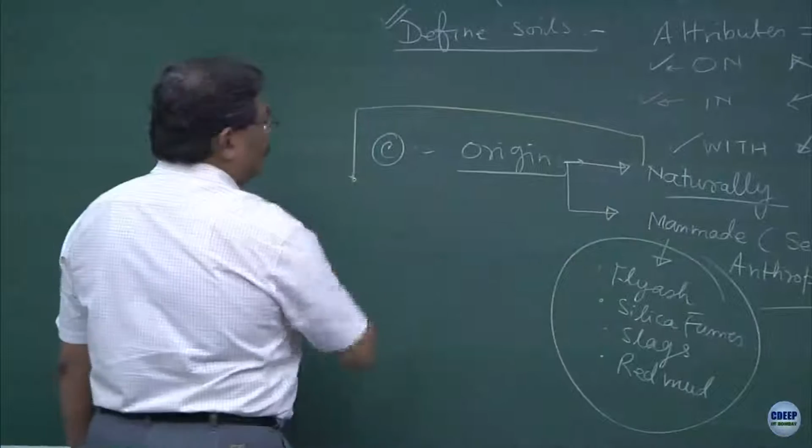So, when we talk about naturally occurring soils, and there have been a lot of questions regarding this, these are basically from disintegration of rocks, which we discussed some time back. There are three types of rocks you must have studied.

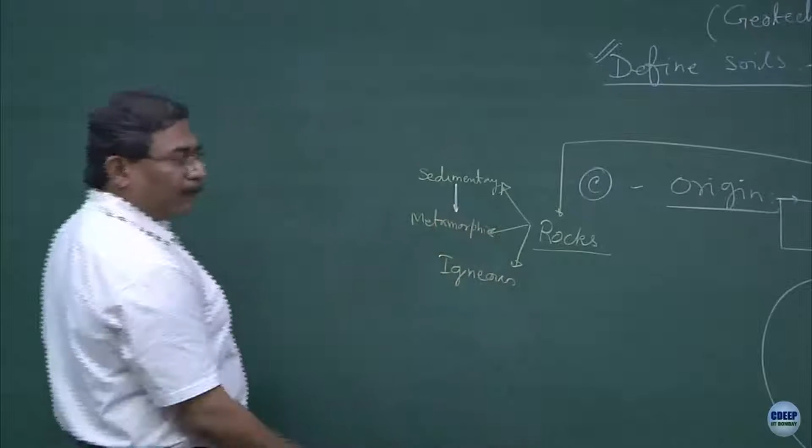Very good. Sedimentary, then... why have I written it like this? Metamorphosed or metamorphic? So, this is basically the rock cycle, is it not? So, sedimentary to metamorphosed or metamorphic, and further action of pressure and temperature and all the agencies which we have discussed, the carriers. Mostly this is P and T, pressure and temperature conditions.

So, sedimentary is the one which is, remember the Himalayas, there is a lot of weathering process going on, big boulders getting formed, they keep on hitting each other, they get fragmented because of the flow of water. Each fraction keeps on becoming smaller and smaller by the time it comes to the Gangetic plain. And then from the Gangetic plain up to Calcutta, Hooghly, all these areas, what happens? Even the small particles become much finer, alright.

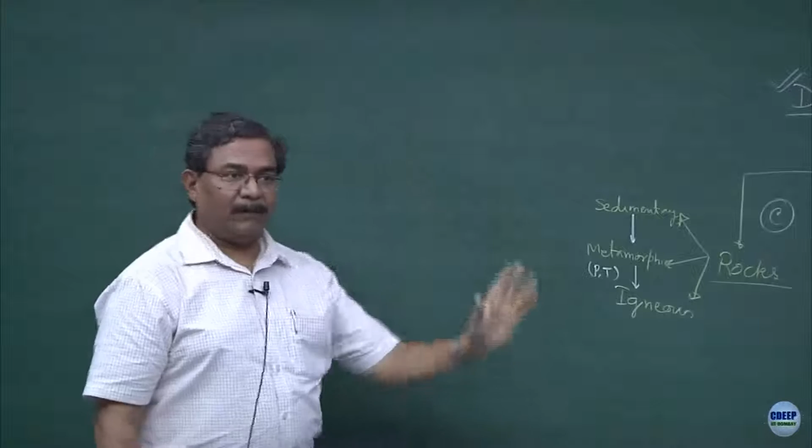So, conversion from very big size to medium size to the finest size, and this is a journey which the material is following, in geological time scales. So, sedimentary is something, please understand this concept carefully, this is going to be useful forever. You have seen deltas, alluviums, fan formation. Sundarban is a beautiful example of a delta which has got created at the junction of the Bay of Bengal and the Hooghly river.

So, what has happened? Suppose you do the mechanics of this problem. The river is bringing sediments. What are these sediments? These sediments are the disintegrated form of the rocks which are coming all the way from the Himalayas, mountains, clear? And they have been travelling so long in terms of time and distance, and they got fragmented, they got super fine. Weathering process, somebody was asking what is weathering. So, these rivers have a lot of suspended load, we call them sediments.

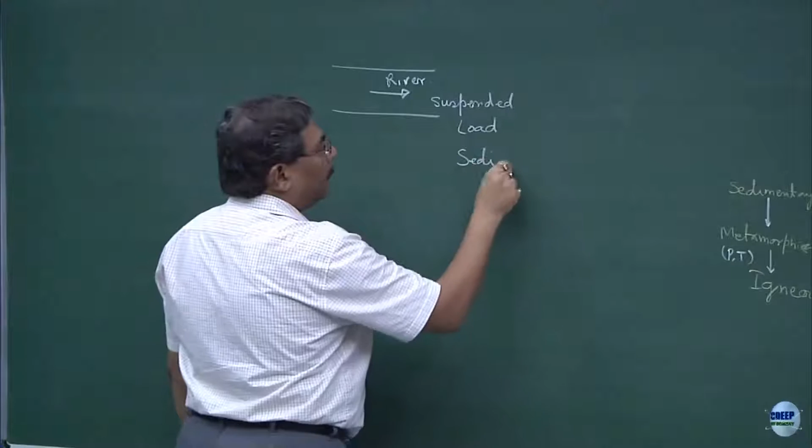Alright. Mostly this is fresh water. Try to capture the attributes. For an engineer the attributes are very important. So, the keywords which I use, what did I do? I said river, and then I said suspended load, from where the suspended load is coming, from all that weathering process, agreed. And then suddenly I brought in the concept of fresh water. What does fresh water have to do with this context? Density of the fluid, clear?

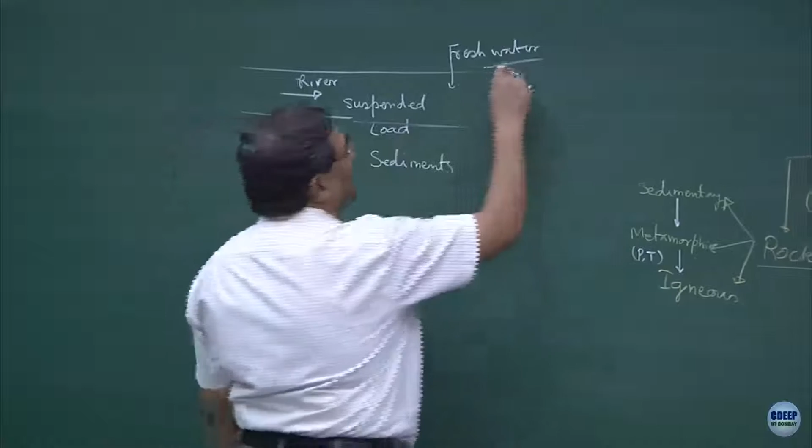So, the fresh water, let us say, because I am sure all of you know that from the stretch of the Himalayas up to a certain portion where the Ganga comes, the water can be drunk without filtering it, and then human activities start and the water becomes polluted, clear? But there was a time when people used to drink it up to Varanasi or Allahabad or Gaya and Prayag and what not. So, this is fresh water, its density is going to be less, and it suddenly comes and meets the Bay of Bengal.

I am sure many of you would be taking it up as a research project in your career in whatever form, I do not know. So, it is very deceptive. Right now you think you will never do this, ultimately you end up doing this. Even if you become a CEO of a company, you will realize that most of the development is going on now in these areas in the country. Most of the companies are establishing themselves over here.

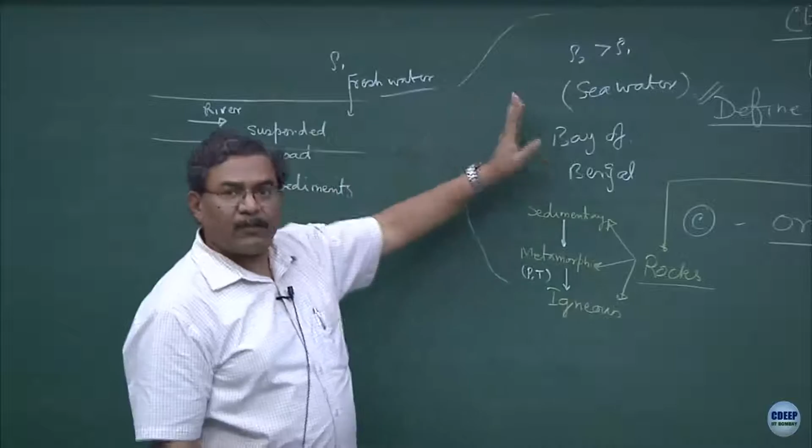Now, what I am going to tell you is, this is typical sea water. What is the emphasis? Why am I saying sea water? Salt is fine, density, correct? Density contrast. So, if this was rho 1, this has become rho 2, where rho 2 is greater than rho 1. What is going to happen? A lighter fluid entering into a denser phase. What is going to happen? Sorry? Say it loudly. No. Yes. Someone else? What are the attributes of the system?

This system is fresh water having a lot of suspended load. All of you must have realized the turbulence in the aircraft when you travel. Why do you face turbulence? It becomes jittery. Why? You are going from a lighter phase of the air into a denser phase, clear, particularly when you land, then most of the problems come. And when you take off, imagine, close your eyes, you are moving into a denser fluid and again coming out into the lighter fluid. Is this correct? So, the same thing is happening over here.

The rivers carrying suspended load, and these suspended sediments are entering into a denser phase. What is going to happen? Velocity reduction, number 1. The moment velocity reduction occurs, all these sediments will have a tendency to settle, correct?

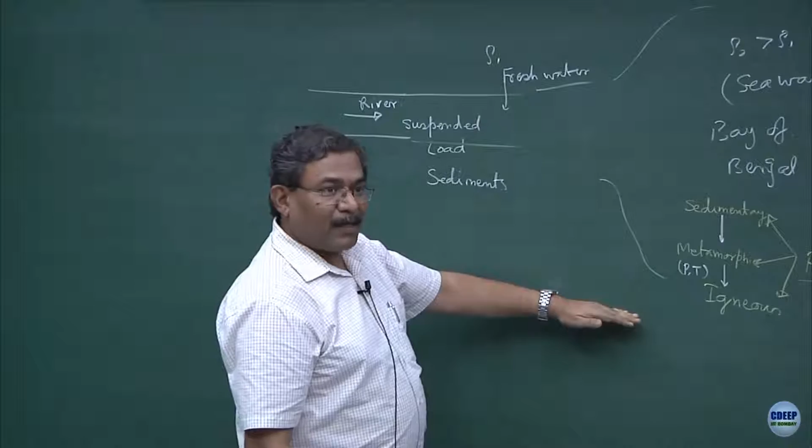Sedimentation process. Is this part clear? The rocks which are formed because of the sedimentation process. Now, what are the major players in the formation of the sedimentary rocks? Simple process like this: loads of sediments which are present in the fresh water are entering into a system which is denser.

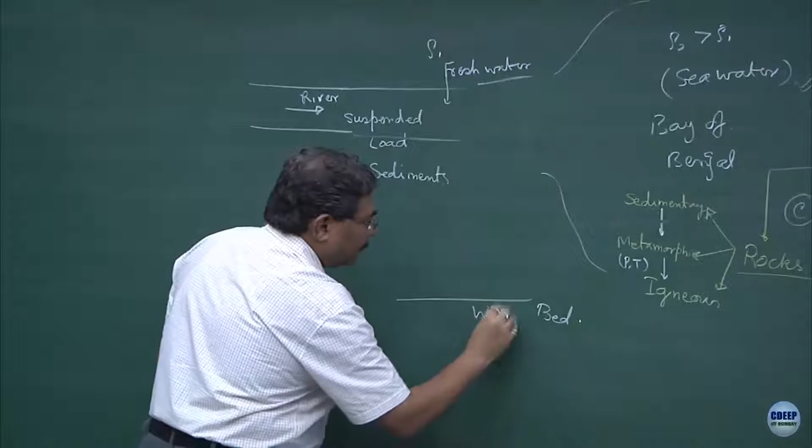Sediments have a tendency to settle down. Now, look at the micro mechanism, what is going to happen. So, if this is the river bed or ocean bed or whatever it is, I will say water body bed. So, this is the bed of the water body, clear? And imagine this is the fresh water. Normally water we depict like, you make a triangle and draw something like this. This becomes a water level, clear? Connotation is like this. For soils we show a horizontal line and this is the ground level.

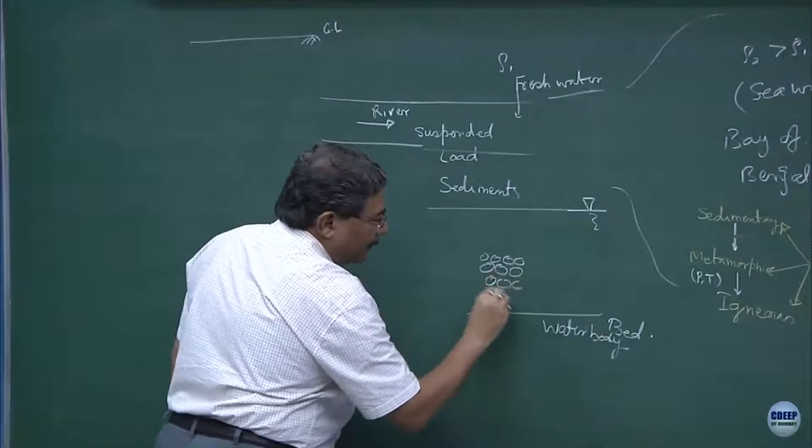Is this okay? So, all these sediments, mostly coarse grained materials, they keep on settling. Initial process. Next load of sediment comes, it gets deposited like this. The whole process is happening under gravity, clear? Nothing else. In the process, somebody was asking about bacterial action. Might be a situation where the bacteria starts secreting something and they all become a cohesed material. Cohesed means cohesion. Individual grain is now getting glued because of either microbial activity or it could be because of physical activity also.

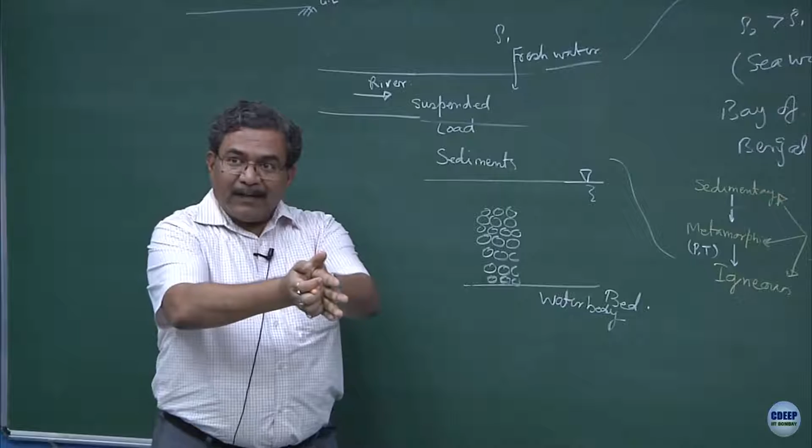Suppose if I take two particles, take two balls and press them hard, cold welding, what happens? There is a contact which you have created, very high pressure, clear, and low temperatures, alright. Otherwise everything is going on with self weight. Later on I will use this concept to define the state of the material in engineering aspects, that how you are going to make buildings on these type of formations, clear.

Now, this system gets metamorphosed because of several things: pressure, temperature conditions, chemical conditions, temperature, fire, whatever, becomes metamorphic. Under extreme temperatures and pressure, this becomes igneous, it becomes magma, it becomes highly uniform system. So, these are the igneous rocks. I hope you are aware of some of the examples. You can write

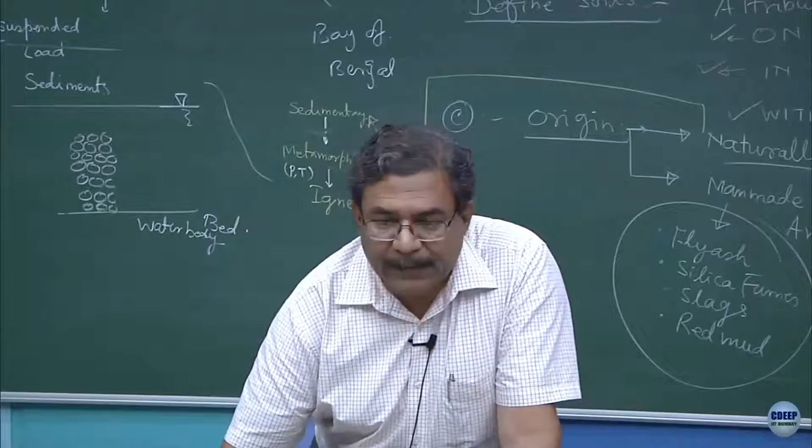what are the examples of sedimentary rocks? Sandstones, clay stones, limestones, mudstones, shale, conglomerate. Fine. I will repeat: sandstone, limestone, mudstone, shale, and conglomerate. Should I write or is it okay? It's okay.

What are the examples of metamorphic system? Yeah, so we were talking about this metamorphosed or metamorphic rocks. So, when the pressures are very high, the type of rocks which you are going to get formed is marble and quartzite, and when temperatures are very high, what will happen? Then you have shale and schist. Slate, see, if pressures are very high, I write normally like this: if pressures are very high, then you have marble and quartzite.

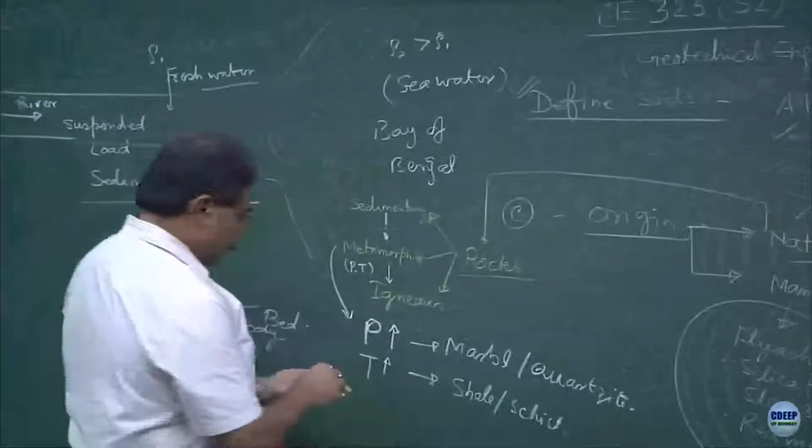And when temperatures are very high, what is going to happen? Shale and schist. And I think sedimentary rocks, I have given several examples, all sorts of limestone, sandstone, clay stone, they form this category. Igneous rock, under acute pressure and temperature conditions. Any examples of igneous rocks? Basalt, granite, alright, they form the category of igneous rocks.

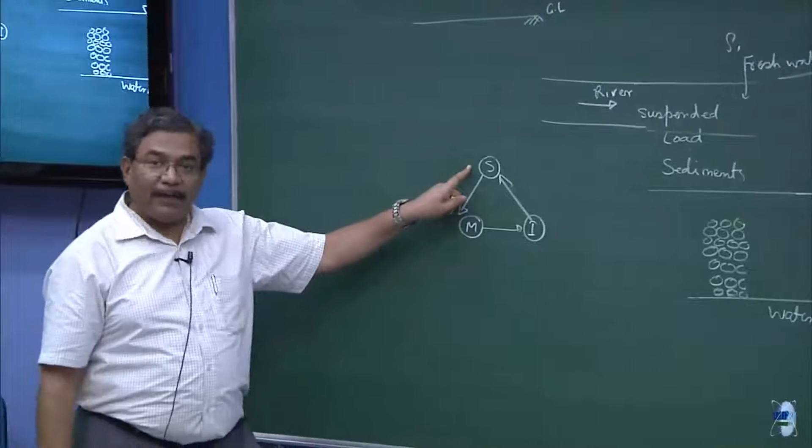Now, soil could be formed because of the processes which we have already discussed, out of any of the three. So, let us use S, M, I. So, you have a triangle, sedimentary to metamorphic to igneous, and further disintegration of igneous might get resulted into the sedimentary also, clear, and at any stage of this you might find soil getting generated. Only thing is that these are functions of pressure and temperature, the conditions. Is this okay?

Now, what does this have to do with the definition of the soils? You remember we were talking about the attributes, profession, then we were talking about uses, then we were talking about what is the origin, and now we have to talk about the transporting agencies. Is this fine? One question which comes automatically is, what is the difference between rocks and soils? Any idea?

Again, this has to be profession dependent. Again, it has to be process dependent. By thumb rule, if I need to cut anything or if I need to blast anything, you were talking about reclamation. Is this correct? Okay. So, if I have to cut something or if I have to blast something, that means a hard system. Normally rocks are cut and blasted.

There are different types of cutters. Right now metro work is going on in the entire Bombay city. You can go and visit what's happening there, how they are cutting the entire rock mass. What are the tools which they use to cut? We call them tunnel boring machines, TBMs. There are very good videos available on the websites, YouTube and all. You can watch them.

I won't advise you to go inside, because some time back when I took some of the students there, one of them fainted at 80-meter depth. Most of you are not physically very fit, is it not? There is a phobia, there is blood pressure, and there are a lot of other diseases which you guys have, and under these environmental conditions, mostly people get panicked. So it's not a very advisable thing to carry everybody there and ultimately invite a lot of problems for yourself. It requires a lot of mental strength, I would say.

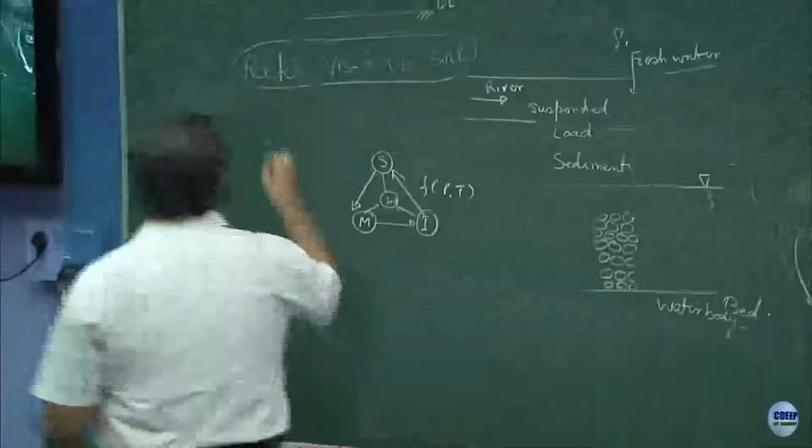I have some videos which I can show you privately of the tunnels which are being done in Bombay city. Anyway, coming back to the point, rocks are the ones which need blasting and cutting. Normally soils are not of that type, they are mostly excavated. Okay. So this is one of the differences in a very layman's language: rocks need cutting and blasting, soils normally do not. But it may so happen that soils also might require some cutting, but definitely not blasting operations.

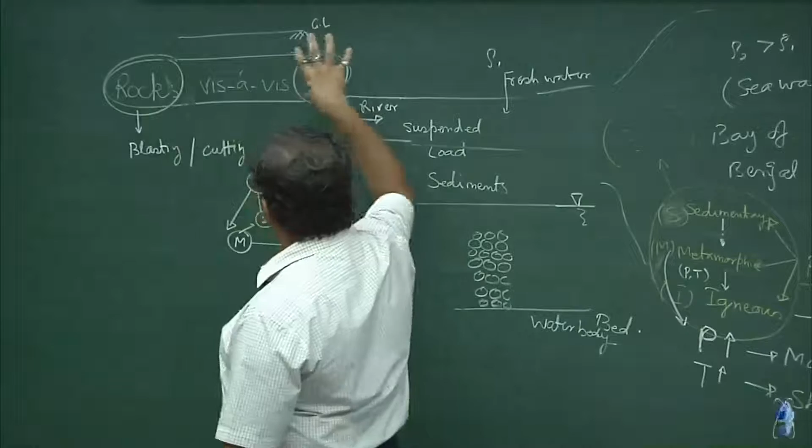You must have studied the Mohs scale of hardness of these materials and so on. I can say that these are the parent material, these are the offspring, and hence the matrix. You understand the matrix? Matrix means texture. This texture is very fine as compared to the one which you are wearing. So the physical appearance, all right. So the texture is different. Rocks are mostly, I can't use the word very smooth, because sedimentary rocks are not going to be smooth, clear. So they are basically made up of stiff matrix, okay, as compared to the soils.

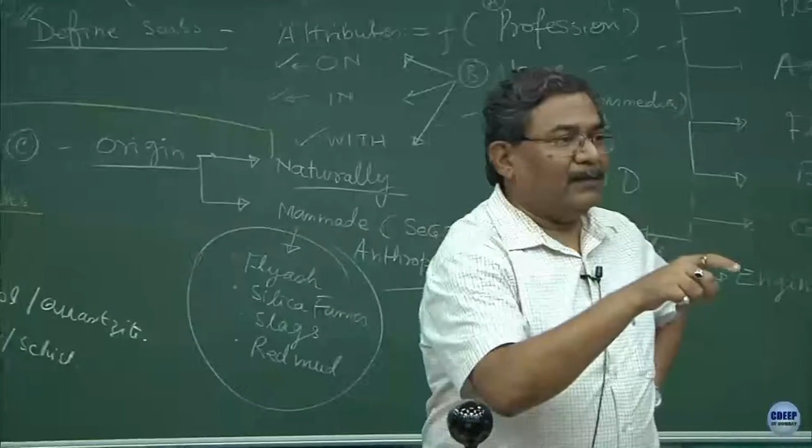All right. This is another way of differentiating, but it so happens that the mineralogy is going to be the same. Why? That is DNA. The linkage is going to be between the parents and the kids, genetics, clear. So the mineralogy of this system is going to be the same as the mineralogy of this system. But somebody was asking about the mineralogy also getting altered. So chances are that whatever minerals are present in a very intact, dense form would be present over here, with or without abnormalities, but not in that dense a matrix. Is this okay?

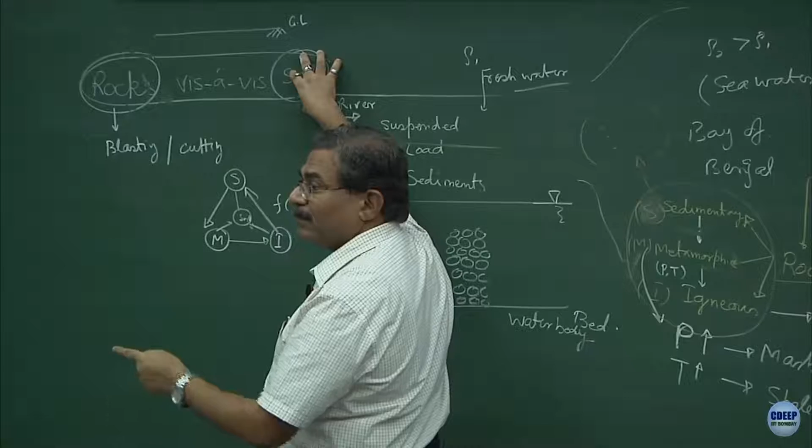Now what you are asking is a research idea. I remember long back when India was initiating the Mars mission, ISRO had sent some samples of the Martian soils to my laboratory. I was a part of that mission. We were testing those samples, and I was trying to understand what would be the relationship between the two. That's what NASA does. They send rovers to take samples of the rocks and detect the mineralogy using X-ray or some non-destructive way. And if I can relate that mineralogy to this, my job is done. I have created a linkage between the two.

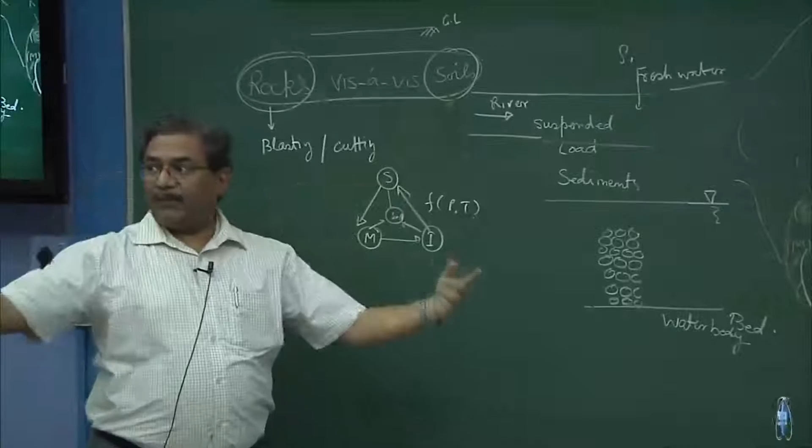Carbon dating is one of the ways to find out the origin of these types of soils. You got the answer to your question? Read more about this. It's a very interesting topic of research, and many people are working in these areas, particularly those into offshore engineering and hydrates, the origin of soils in which hydrocarbons are present, or a particular type of mineral you are looking for. So, as I said, you have to take care of this and your intentions. Put these two together to deal with the material. This becomes more of an intuitive task.

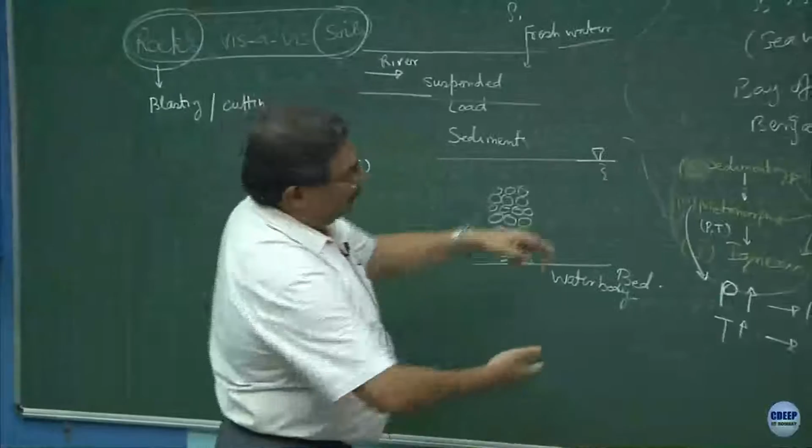Now, let us enter into the classification schemes of soils. When we discussed types of rocks, I linked them with the naturally occurring soils, which is the origin. That is the classification scheme for rock. Now, let us talk about the classification schemes which are used for soils.

If you remember, in the beginning of the lecture I said creation is one thing, transporting agency is another thing which attributes a lot of knowledge into the system, and the ultimate thing is how it gets deposited. You remember the three stages: origin, transportation, and deposition. There I tried to give you some hints—somebody goes outside, gets exposed to the environment and society more, as compared to one who remains confined to one place, in residual systems. Clear? We will talk about this now.

These are naturally occurring processes. You can contain, you can slow down, you can retard the process—that's engineering, that's technology.

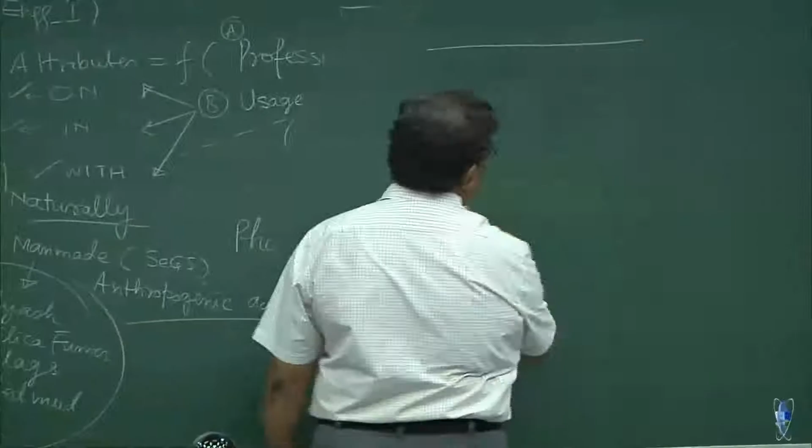If you go to the Middle East, it is famous for having big cavities in the subsurface strata I was talking about. So the million dollar question is: check it on the net, why is it difficult to lay foundations in most regions of the Middle East? Suppose I lay a foundation over here—you never know there will be a big cavity over here. What is this cavity? Look at this, another example of the chemical process.

Coming back to the question asked—these subsurface deposits are very notorious, mostly limestone, and they sit in coastal areas. What does seawater have to do with this? This seawater ingresses into the foundations or strata and has a tendency to eat up the limestone, creating cavities under very specific conditions of pressure, temperature, and humidity. This is known as lime dissolution.

I was a consultant to Bandra Sea Link—I don't know if you're aware. All the foundations were designed and verified by me in 1998-99. A big problem was this: you might lay a foundation over here and never know there is a big cavity waiting for you. Hope you understand what happens—caving in. The moment traffic goes on the system, the entire pier of the bridge or the foundation might sink into the cavity. So in UAE, Sharjah, Middle East, Oman, all these places, the big problem is lime dissolution because of seawater under very specific conditions of pressure, temperature, humidity, and salinity—a chemical process.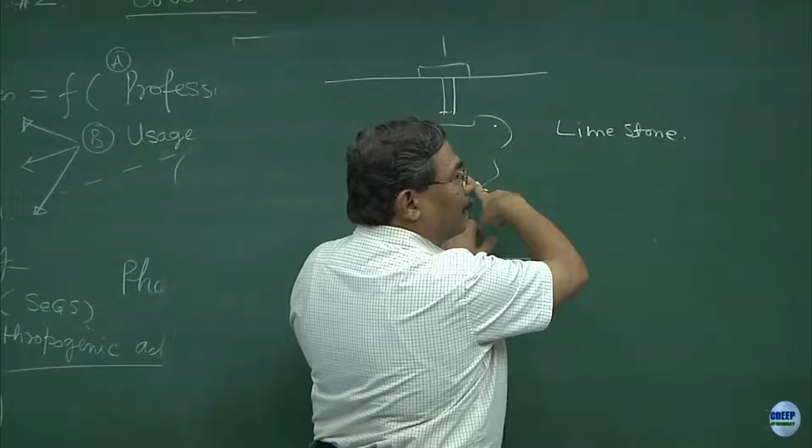Your question was—repeat it now and link it with this. My question was whether the conversion of rock to soil is a desirable process. So here I've given you a phenomenon where the limestone has gotten dissoluted—another extreme. The discussion was that nothing is in your control. You remember, this is what we were discussing—it's a natural phenomenon, I can't stop it. There is no way I can put a containment like this.

It can be done only on the blackboard. In real life, you cannot do it—water will come from down below. So you can't control it, you have to live with it. Now where is the engineering? Engineering is fully knowing the facts that this is going to happen, and having a strategy in my mind to counter it, so that if the system is going to sustain itself for 20 years, I will add another X years to this. That is my engineering and technology. You got this point? That is it.

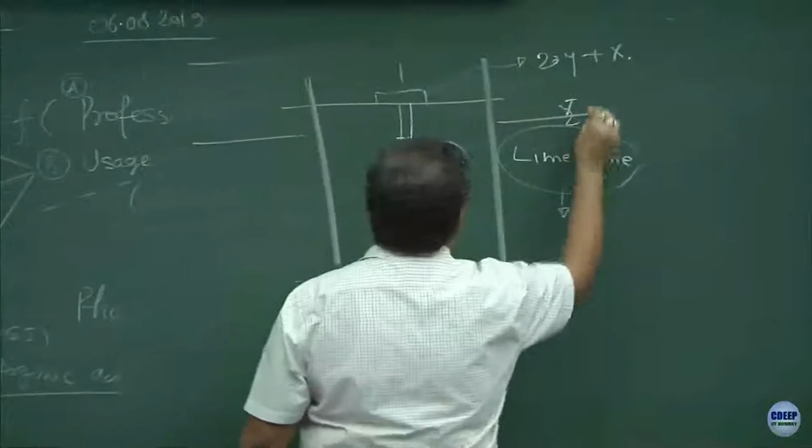So what are technologies doing? They are providing techniques like surgeons. What do surgeons do? They do colon surgery—they cut your intestine and connect it to a pipe. What have I done? This is the seawater—haven't I done the same thing? I have cut the access of the seawater from the structure by providing some bypass. Are you getting this point? We will discuss this in detail.

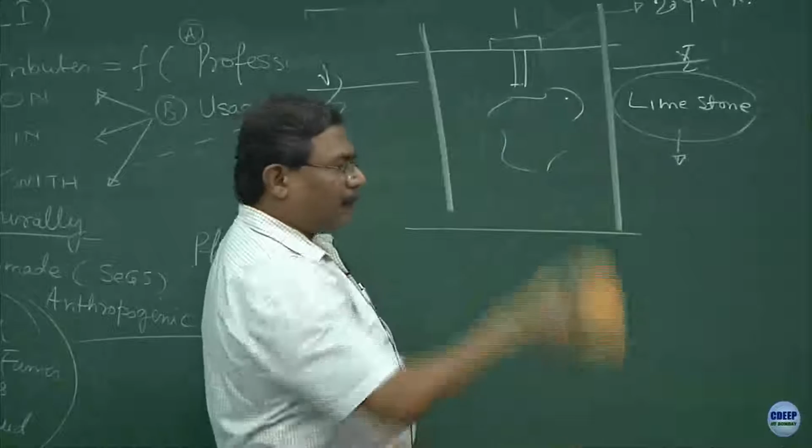So another thing—can you tell something about what is happening in the Rann of Kutch? They also have the entire area covered up with salt. Is the soil somehow changed in some way by the sea? Rejuvenation of deserts—read this topic, write it down: rejuvenation of desert areas. And second, when you come down towards Bhavnagar and these Rann of Kutch type areas, we're talking about ingress of salt water into the soils. How would you stop this? How would you rejuvenate the entire land? Have you ever been to these areas?

Why go all the way from the eastern part of the country to the extreme west? I have recently been to the Rann of Kutch—so what did you see there? The festival—meaning the Rann festival which happens in winter. I had been there to visit it. The Government of India's atomic energy program depends largely on the bentonite which comes from that area. I told you about 1.5 hours back, if bentonite is not there, you can't run your atomic reactors. So the Rann of Kutch is very famous for minerals, and nowadays, if you've gone towards the Pakistan border, the Koteshwar temple is there.

No, I haven't been there. Google Maps, you can check.

From there the border is hardly 35 kilometers. This is the area where most of the mining activities are happening and most of the industries are being set up.

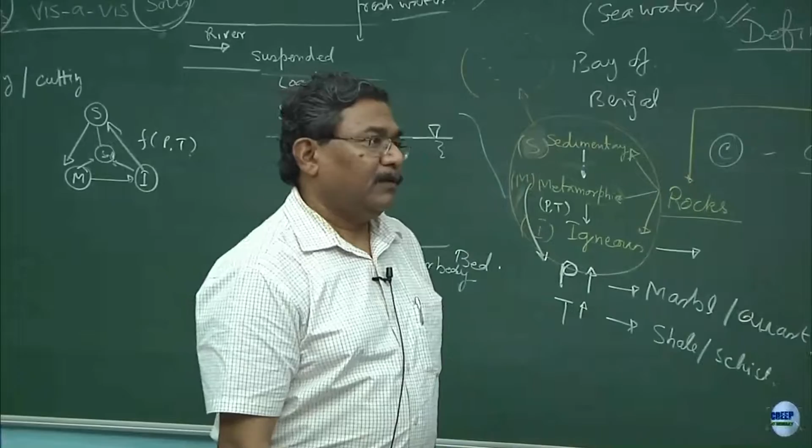So I am consulting at two of the places there. Extra deep mines, somebody was talking about the mining in this sector, somebody was talking about the mines. So when you do extra deep mines, what is going to happen? Salt water intrusion, salt water getting flooded into the pits, and you do not know how to survive. It's corrosive water, clear? So then you have to do something.

Okay, so let us talk about the geological classification of soils.

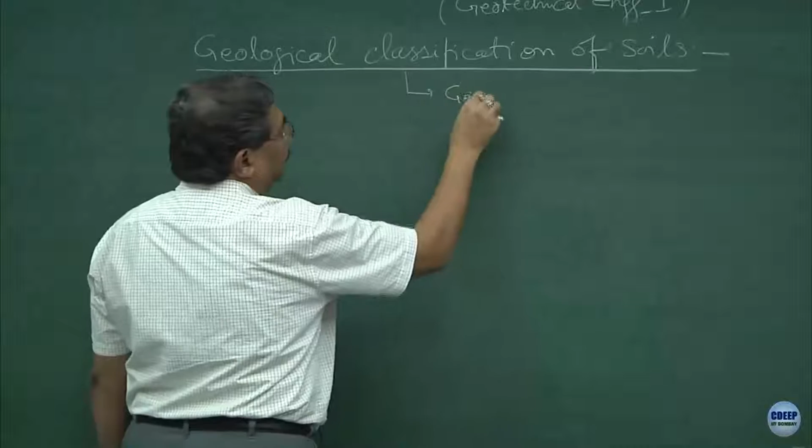Mainly this whole thing is including genetics into it, the heritage. They have a family tree, family heritage, is it not? We call it genetics, genomics, whatever you may call it. So most of the time geological classification carries a connotation of the geomorphological features of the soils. Geo is earth, clear? Geotechnical - techniques which are going to be used to understand the materials lying inside the earth or on the earth, geotechnical, clear, and engineering with those materials.

So when we talk about this, the first thing which comes to mind is these are two broad characteristics. The first one is transported, and I think you are all aware now what transported soils are, and the second one is the residual soils.

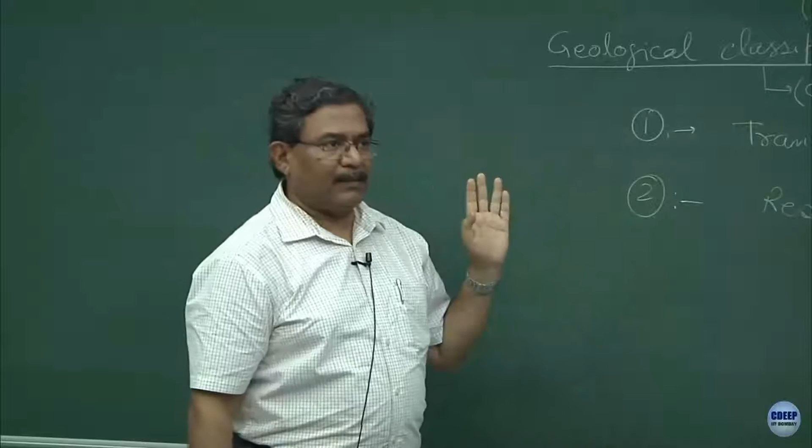Transported soils, after weathering is over, get transported from one place to another place by a transporting agency, clear, and we discussed about two-three things. So the transporting agencies - say it again, what are the transporting agencies you were talking about?

Water, wind - not air, wind, there is a difference, use right language - water, wind, gravity, human activities, oh very nice. The one which you have forgotten is ice, clear. There is another form of water, but ice is also a transporting agency.

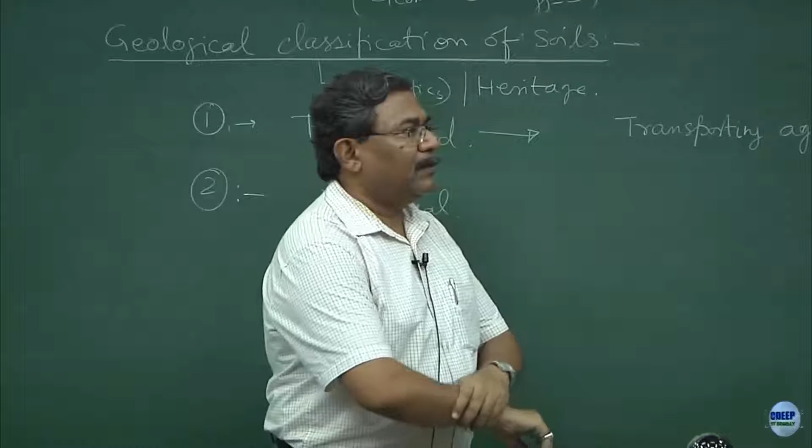Why? Avalanche. How many of you have seen an avalanche, not only in Hindi movies and Hollywood, Bollywood movies, but in real life? How many of you have been to Manali, Rohtang and all these places? You must have seen a snow avalanche. What are the properties of snow avalanche? These are also geomaterials. Why?

Anything which is resting on earth, even we are also geomaterials, agreed? We come out of it, we live on it, we spend some time on it and again we go back into it - a perfect example of geomaterials. And in the process what not we do? All chaos we create. You agree? Is this fine? So avalanche is also a sort of geomaterial.

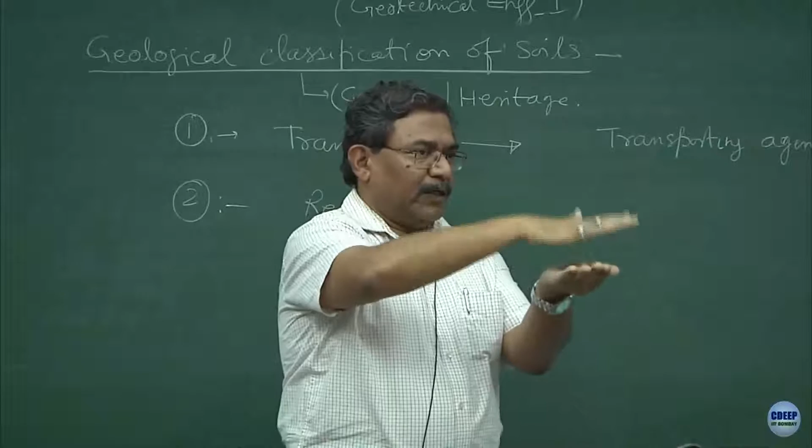Water vapors getting deposited in the form of snow and settling down over the upper reaches of hillocks or hills, and under extreme low temperatures and high pressure - from where is the pressure coming? The first layer I was talking about, the sedimentation process, that was river induced. Now what happens? The first layer of snow comes, the second layer, third layer, and self weight compaction, consolidation, clear - we will discuss about this in detail later on. And ultimately this whole thing becomes so hard. So the moment temperature changes, climatic conditions change, it breaks and slides, it hits something, causes a disaster, alright.

So transporting agencies are, as you are rightly saying, water, wind, ice - this could be any other human activity, gravity and so on, fine.

Now, like human beings, we are in different continents, agreed. So why does ice become a very important carrier or transporting agency? You go to another continent - Scandinavian countries, Norwegian countries, where most of the time the entire thing remains snow bound. There is no free water on the surface, clear. So it is not possible that the rivers are going to carry anything from one place to another place, clear. So this is totally because of the ice effects the transportation could occur.

There is another logic - my suggestion would be that the soil mechanics which you are studying should not be confined to only the Indian context. Ultimately what do you want to become? You want to become an international guy. So geography should not bind you - I have not talked about geography, I will talk about that also. Is this okay?

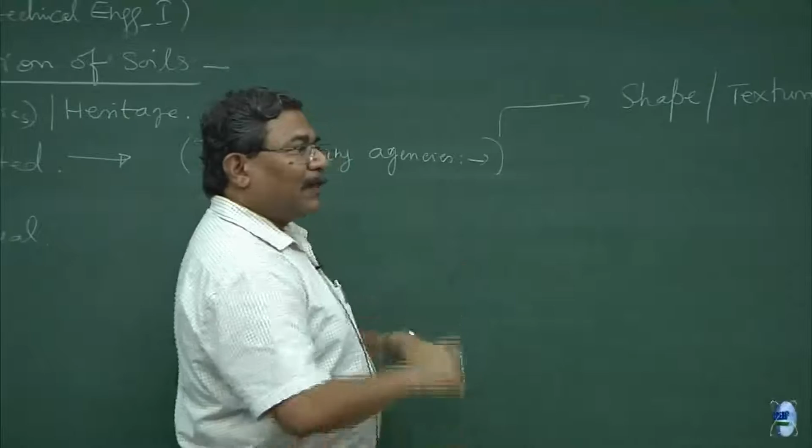All these particles will be getting washed, I do not know for how many times in their entire life. So what will happen? Shining particles, and more and more abrasion takes place because of the rolling effects. Rolling is taking place because they are coming from higher reaches. So what is going to happen? The water acts as an abrasive, it gives the abrasive effect. So the particles are going to be mostly perfectly spherical, in layman's language, not microscopically.

Typical sands. Sands are one of the varieties of soils. Somebody who was sitting here said mud last time. Oh yes, so mud is a layman's language, clear. So technically when we say soils, one of the varieties of the soils would be sands, clear.

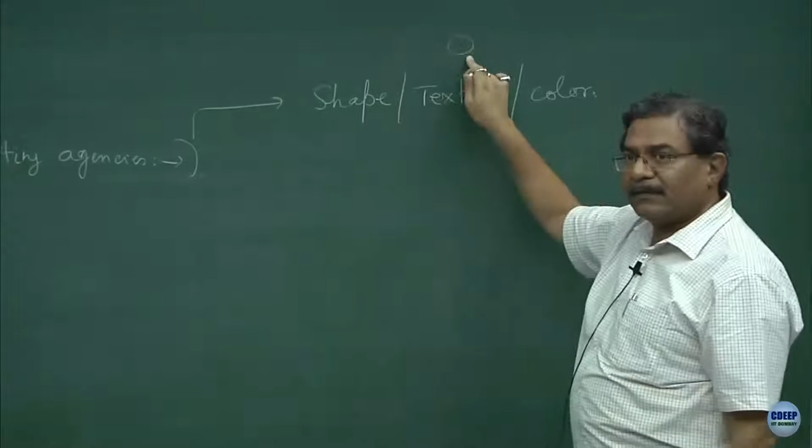Round particles, why? When they got broken because of physical, chemical, biological weathering, they were all distorted. But look at this, the moment they started traveling from A to B, there were so many rollings occurring, water is washing them, and ultimately what happens? They all become minimum surface area. A sphere has minimum surface area or maximum surface area? Minimum, sure. Why not maximum? Because that is the law of entropy.

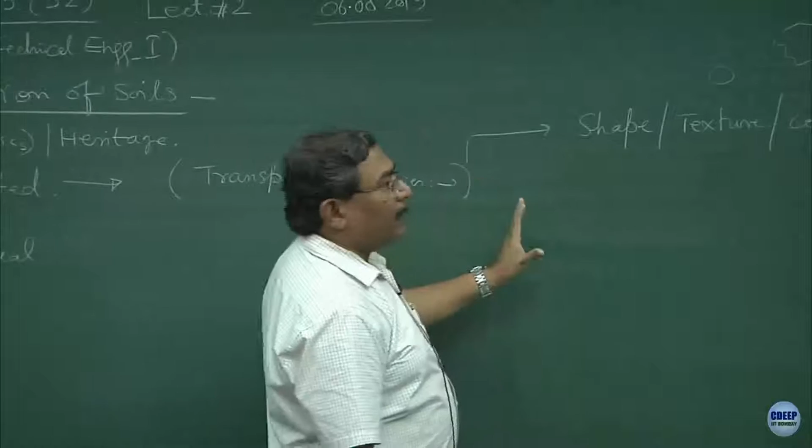So these particles are going to have the minimum possible surface area, inert in nature. Anyway, coming back to the point, this transporting agency is also going to shape up the whole morphology of the particle. What is morphology? Shape, size, roundness, irregularity. This is a perfect sphere, I could have drawn a sphere like this. The particles are like this also, irregular shaped, clear. There could be a particle like this, flakes, okay.

So it all depends upon which transportation agency is acting to transport the weathered material which is coming out of the rocks. It is expected that water is going to create a system of particles which is near spherical, shining, very good looking, fresh quartz, pinkish color, peculiar properties of Gangetic sands. Alright. Mostly aerobic process is controlling the whole process. I hope you understand what is aerobic process. Now I have interlinked environmental engineering with geotechnical engineering, so this answers your questions of bioactivity and what is happening and why, clear.

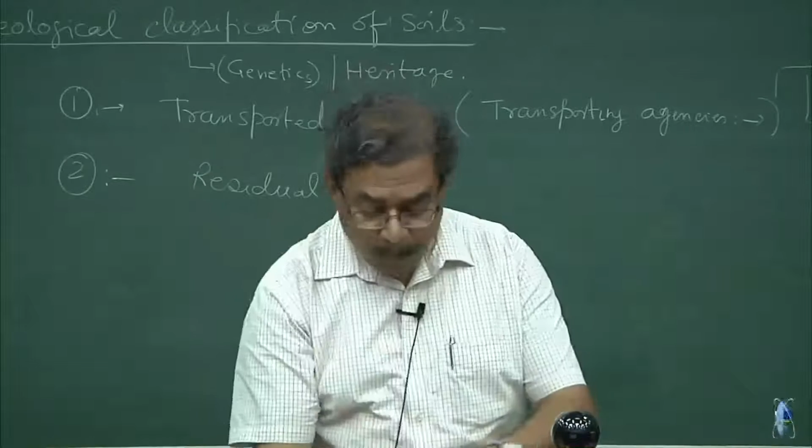So the texture, the shape and the color get guided by the transportation agency, be it water. Now tell me, if I replace water with wind, what is going to happen? What do you expect? Fine particles. Good, fine particles. The most important attribute associated with wind would be... very good, light, excellent. So weight of the particle, clear. We call it specific gravity.

So when wind is playing an important role, what is going to happen? Particles will not be so smooth. Why? Wind is not so abrasive in nature as compared to water. You agree, is that correct? That means here the chances are that the particles are going to be more irregular but lighter in nature.

So what is the problem associated with pollution in NCR, which you are reading in newspapers, and what can soil mechanics guys do? What role can they play? This can be a good question. What could be the role of a geotechnical engineer in stopping the pollution of NCR? You are a civil engineer, you are a geotechnical engineer, what are your views on this? This answers your point also.

So when wind is playing a role, particles are going to be mostly not very rounded, number one, and they are going to be lighter, so that they may become airborne, otherwise they will not get lifted up, alright. So these particles are going to be lighter as compared to the particles which are being carried or transported by water. Difference is clear? They form dunes.

These particles are lighter, their structure is like that. If you take a particle and put it beneath the SEM, scanning electron microscope, you will see that they are very furry, with a lot of protrusions, furs. Why? Because they have to become airborne, airlifted, and they form aerosols.

Half of the problem of NCR is because of, in summers, dust storms, and in winters, these particles remaining in the air forming aerosols. Agreed? That is the problem. How would you solve this? Rejuvenation of deserts, clear? How is a big question.

We are talking about some process by which I can convert soil into rock. I can use this to get rid of this problem. Try this at a global level, not in the laboratory—in the laboratory enough experiments have been done. Read about that; these are the answers to the questions you are asking.

So mostly these types of soils are known as aeolian. I will talk about all those things, don't worry, just understand the concepts right now.

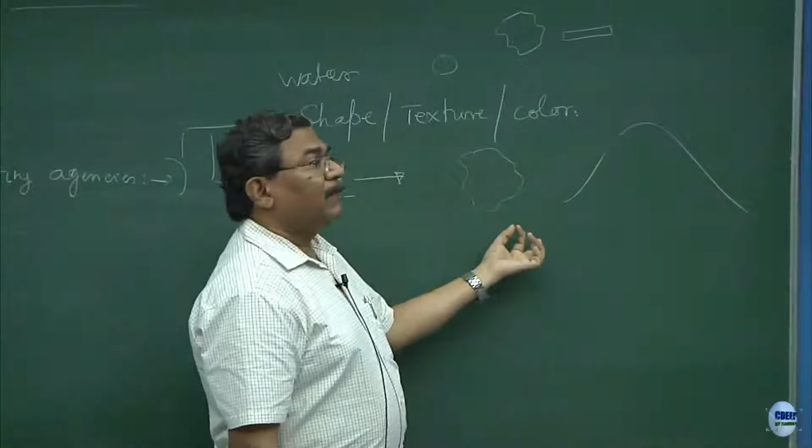How about the size? When they are getting airlifted, airborne, particle size has to be extremely small. So next time you go to these deserts where the dunes are, if you touch the sand and rub it too much, the chances are you will cut your skin and may bleed. Why? Irregular shape, very sharp edges. So they are so irregular shaped, with very sharp cutting edges, that the moment you touch them and rub them on your palm, you may bleed.

What about the color? There is no washing going on with water, so the color is going to be muddy, not sparkling or shining pure colors. These are going to be mostly brownish and dirty looking colors. Done.

How about the ice? We will talk about this very special category. So water, wind and gravity—gravity is again a sort of combination with rockfall, but normally we do not consider gravity as a transporting agency—and then man-made, which we were talking about.

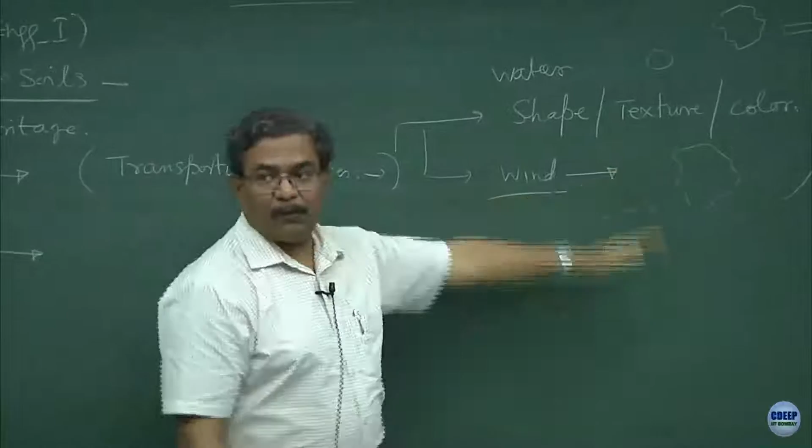The second category is residual. So again I will repeat: geological classification of soils is such that soils get formed because of weathering, and then a transportation agency transports the material from its original formation place to another place, which is the deposition. I am using the word formation twice—one is the process of formation, and another is the deposition which results in formation.

In residual soils, it's a different story altogether. Incidentally, these are very good building materials, with a lot of pozzolanic activity. Read my paper on desert sands of India—I don't remember the exact title, but it was written long back.

This is a classification of desert soils from India. Let me just check it on my website. There is a paper on this in Engineering Geology, and that paper is quite in demand because most of the guys producing cement want to use this technology to directly use the sands in making concrete. We are negotiating.

Now the residual ones are the ones, as I said, that were formed—very unfortunately, nobody allowed them to move out—they got created there, formed there, and got disintegrated there also. But in the process, these are the best soils as far as the economy of the nation is concerned.

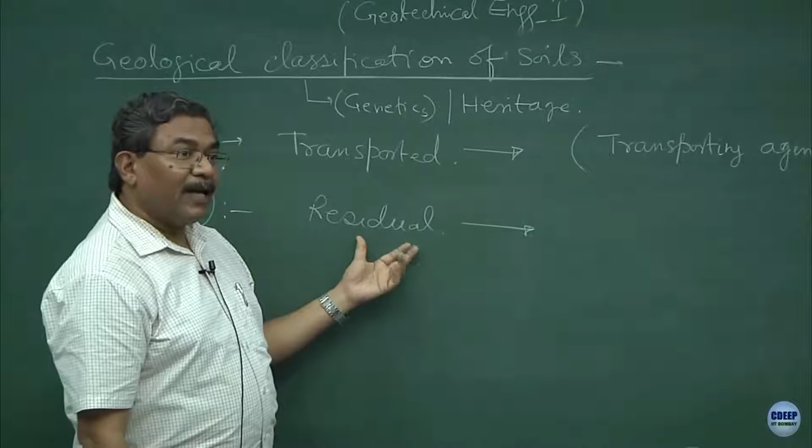Any guess? No. Another guess? Economy is always what? Hydrocarbons, oil and gas. Nothing can beat that, you agree?

Yes, okay. So these are the soils which are the best deposits of what? Best deposits of hydrocarbons, oils and gas. Why? They got formed, they could not get transported, they remained deposited there, and they got disintegrated because of microbial biological activity. So these are the ones storing maximum reservoirs of hydrocarbons.

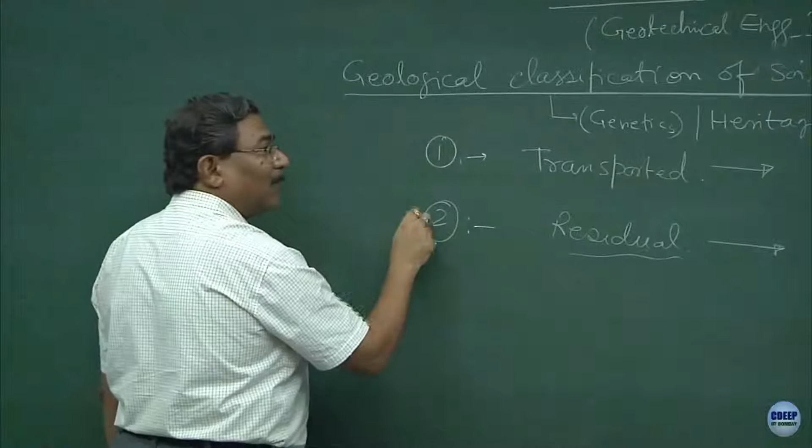Now tell me, which one is good or bad? No one—I think this is what we were discussing during the break. Agreed? Intentionally I gave you this example. So my job is, whether this is with me or this is with me, what am I supposed to do? I can always switch over my dharma. Here I will be a beautiful geotechnical engineer, and here I will try to help the guys into hydrocarbon exploration, because without my help they can't do any exploration, remember. So I can earn both ways. That's the art of practicing geotechnical engineering.

Is this part clear? I use the words 'art of practicing geotechnical engineering'—that means the concepts remain the same. What do I have to do? I have to just use this material the way I can, and here my strategy will be changing, so I will use a different strategy. So residual soils are the ones which remain deposited after getting generated at that place.

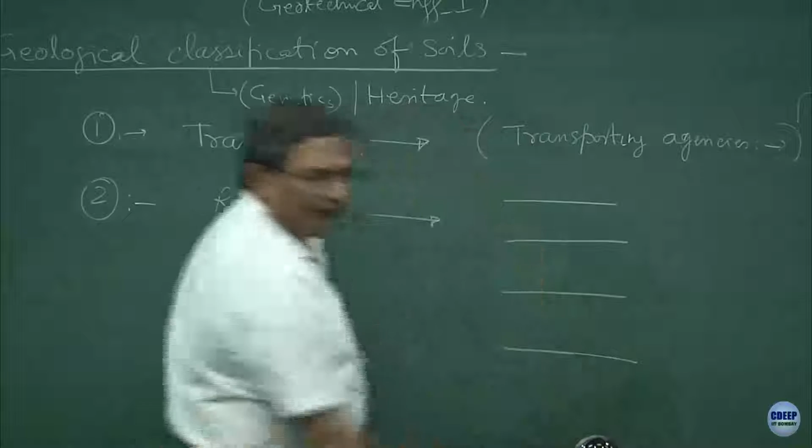So there is a typical way of showing this. The upper layer is known as the upper zone, followed by the intermediate zone. This is the schematic diagram for depicting residual soils, followed by the partially weathered zone, and this is followed by the parent rock.

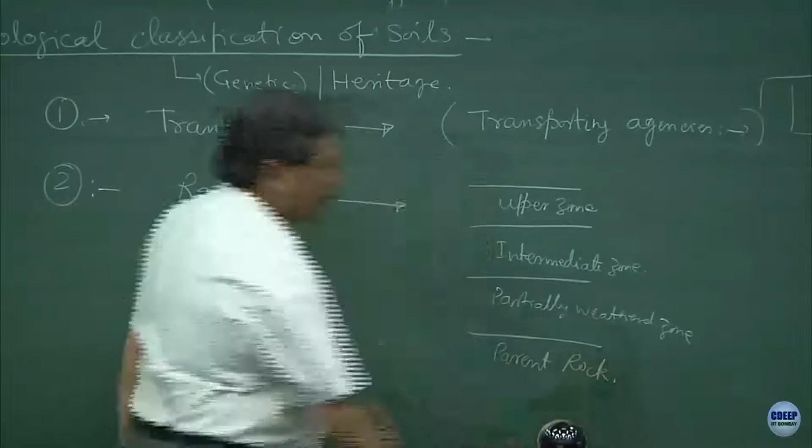Alright. So this is how the depth varies, this is the extent, and this becomes a strata for me. So most of the regions of Bombay, coastal areas where we are right now, if you have to learn geotechnical engineering, the best places are coastal areas, not the Gangetic plains. So this is a subject which flourishes in coastal areas. Why? Okay.

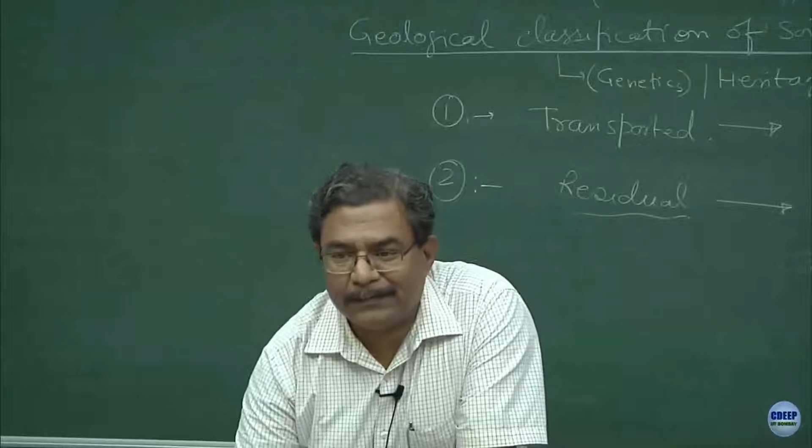Any questions? So, here we will have size, shape, texture, angularity, which petroleum geotechnologists have to learn from you. He is amazed to see the role which civil engineers and geotechnical engineers have to play. What was in your mind before, let us say 29th we met, is it not?

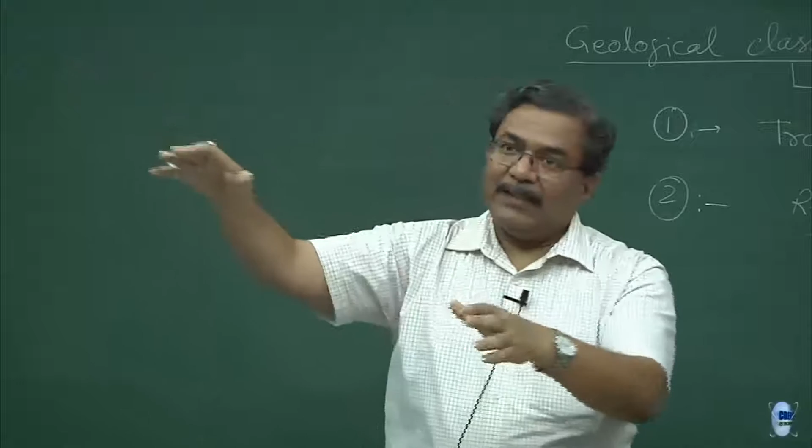So, when these snow, what you call them in the layman's language, on the hills, when they slide because of environmental changes, they carry a lot of soil along with them and soil gets transported. This is what is known as transportation of soils through ice. Okay. Yes, anything else?

Okay. Now, 5 o'clock. All right. So, let me give you now few examples of classification of transported soils now. So, different types of transported soils. The first one is, depending upon the transportation agency, all these groups have been created.

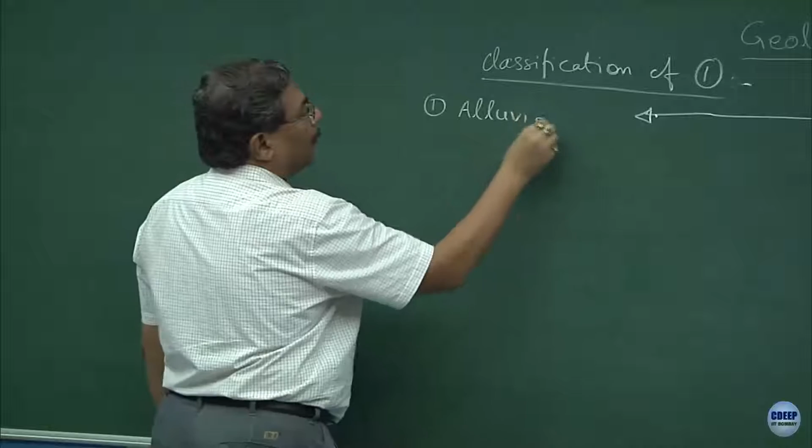You know what is alluvial soils? Sometimes you may say that these are the deposits as well. What is an alluvium? What is alluvium? The soils which have something to do with the water. Clear? Alluvium. Check the dictionary meaning of the word alluvium. Check the meaning of all these words which I am going to write. Clear? And try to remember them.

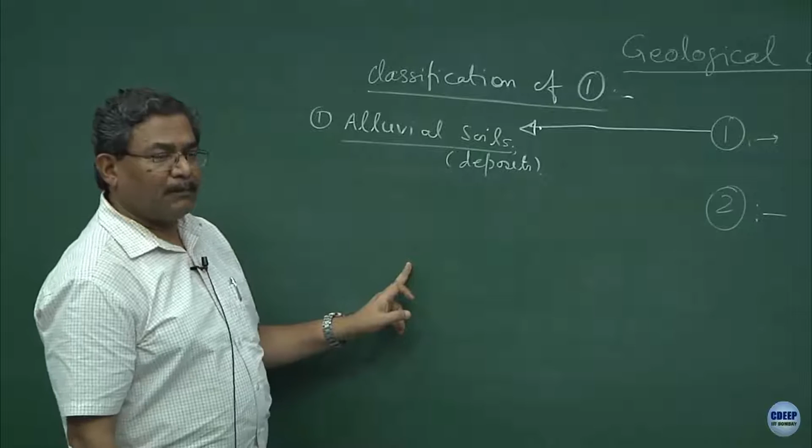Yes, Manan. What is the meaning of word alluvial? Correct. That means the soils or the deposits which have been created by running water. Running water is important. You see, each and every word is important. You know why? Suppose if it becomes stationary water, class changes immediately. So, as far as stationary things are concerned, it becomes a different class altogether. So, running water is very, very important.

Why? Because running water will give that abrasive effect, cleaning effect, alright. The particle will be very strong because it has undergone all that hydraulic pressure starting from Himalayas up to that point. Imagine how much robust the particle would be. Specific gravity is going to be good, clear, heavy particle, then only it is going to get suspended. I hope now you are getting a feel of how the attributes are interlinked with each other.

What lawyers do, legal advisors, what do they do? They catch the words. No? You agree or not? In crime series and all these series, what do they show? The whole thing will start with a word and then it will end with the analysis of that word. So, in our subject, the terminology and the words are very, very important. Immediately I objected that it is because of the running water, not because of the stagnant and stationary water.

Clear? So, whatever is getting formed in the Powai lake is different. Okay? Though this is also water, but this is stagnant water. And I am sure with your knowledge of environmental engineering now you can interlink very easily that this process is going to be linked with aerobic and anaerobic. Is this okay?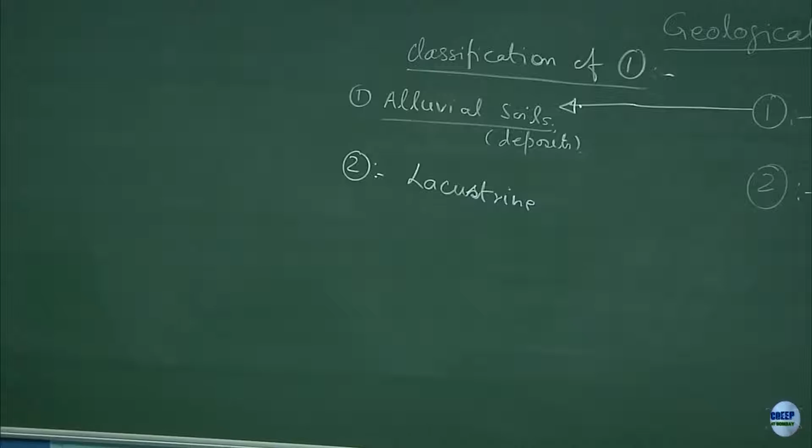The second one is, this is my S, lacustrine. Lacustrine deposits, check it on the dictionary. What is lacustrine? Basically, the term lac has come from lake. So, all these deposits are in the freshwater lakes. So, a lacustrine deposit of the soil is freshwater lakes. Is this okay?

The third one is marine deposits. It so happens that the marine deposits could fall in both the categories. They could be transported as well as they could be residual. You know, particularly in this Deccan Trap.

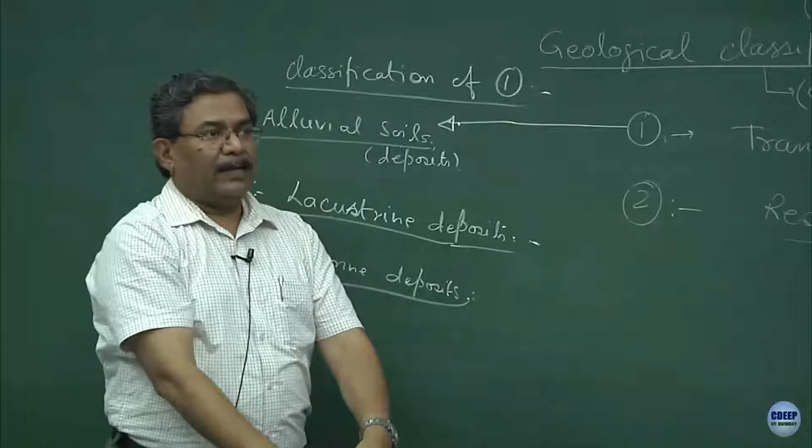I hope you understand the word Deccan Trap, the Deccan Peninsula of the country, starting from let us say Nagpur onwards up to the Cape of Comorin. This is your triangular portion, we call it as a Deccan Trap. All along this Deccan Trap, the soils which you get in the coastal regions are marine deposits. It could be because of delta formation we were discussing, suspended particles coming, and because of the density contrast of the fluid, they get deposited and they get formed over there.

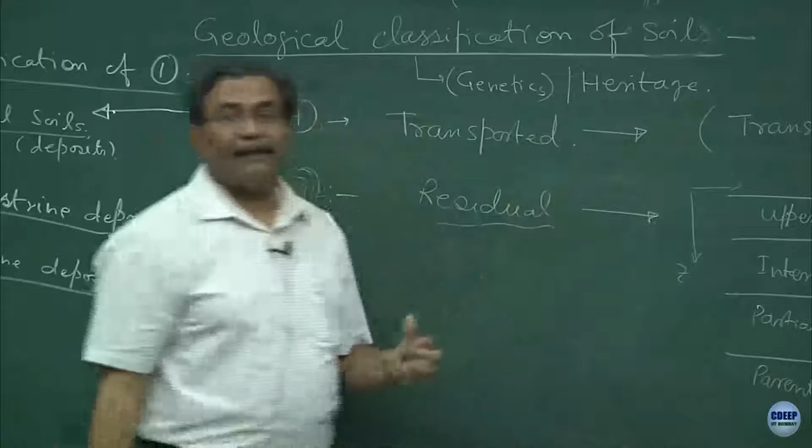We will talk about the marine clays again when we talk about the residual soils. Granite gets decomposed, fine. Somebody was talking about black cotton soil in this sector. I am now hinting on that. Granite getting decomposed because of temperature, pressure, salinity of the water, the way the dissolution of limestone was taking place. Agreed? There is no agency which could have transported it, because sea waves cannot really transport sediments, though people study sediment transportation. So, please do not misunderstand what I am saying.

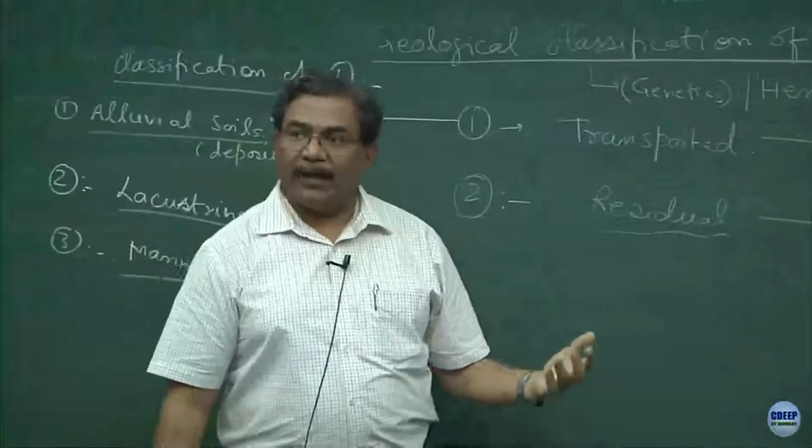Those of you who will be taking a course in offshore engineering will realize this very soon, that these residual soils are the ones which got created because of the weathering of the granite or basalt, clear, and they remain there. They had a lot of organic matter in them, they got disintegrated because of bacterial activity, and they got converted into clays. Clays is another variety of soils, what you were referring to, mud or slush. Slush and mud are not technical words, clear. So, we have introduced two words today, one is sands, another one clays, fine.

So, one of the types of residual soil would be marine clays, and in marine deposits also we can have transported marine deposits. Mostly these are the suspensions in sea water. Then we have the fourth category as aeolian. We call them aeolian soils. What are aeolian soils?

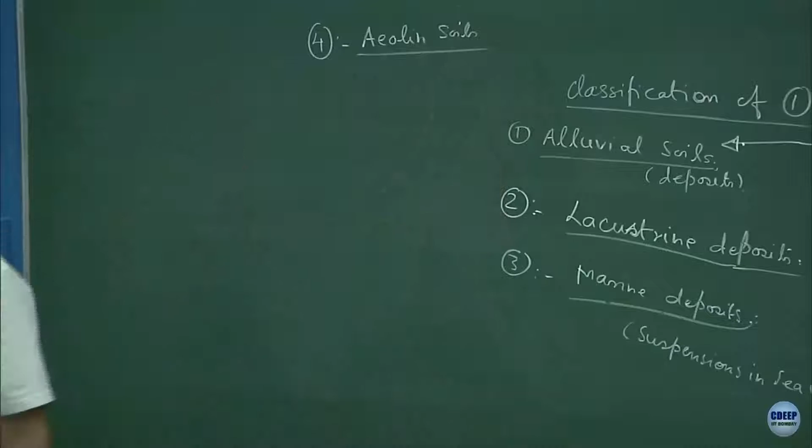Aeolian, A-E-O-L-I-A-N, aeolian. Aeolian has something to do with the air, clear? Aero. These are the soils which have been lifted up by wind activity, and very fine particles got deposited, and hence aeolian. So, most of the transported soils which you have in Jaisalmer, Barmer, Bikaner, the western part of India, these are all aeolian deposits, clear. I do not know how many of you are aware of this or not.

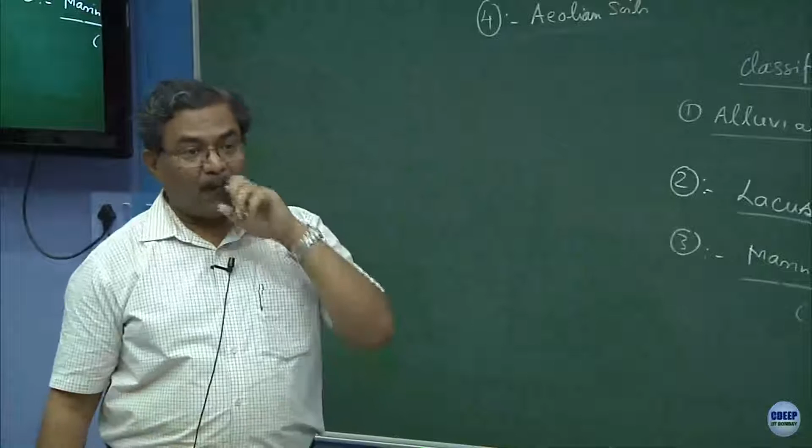There was a time when Bombay High used to produce most of the oil for the country when I was a student. Now, what is the scenario? I have hinted everything, 90% hint I have given to you. So, check it on the net. The western part of the country, particularly the deserts, are the places where now most of the oil companies have started their production. Why? What were deserts earlier geologically? Answer this question to yourself.

So, most of the oil companies are now concentrating on the western part, the bordering area of Pakistan and India. At least 9 new oil fields have been identified, and the work is already going on in a big way. Imagine when you see in Hindi movies these dunes migrating from one place to another place, what is the biggest challenge? Sorry? Direction of what? No, direction is not a problem. Okay, technical issue. Yeah, they are rolling dunes, is it not? They keep on shifting. How to make a structure stand on this?

I said oil production is being done. How to create the facility, infrastructure, storage tanks? You will produce something, you have to store it somewhere, no? Have you ever seen an oil tank? No. You go to the Uran side, there are big tank farms, Morvi, all over the country, the entire coastal area where you have marine deposits, these are the places where the oil is stored. Anybody here from Visakhapatnam? Nice. Why is Visakhapatnam famous as far as petrochemicals are concerned?

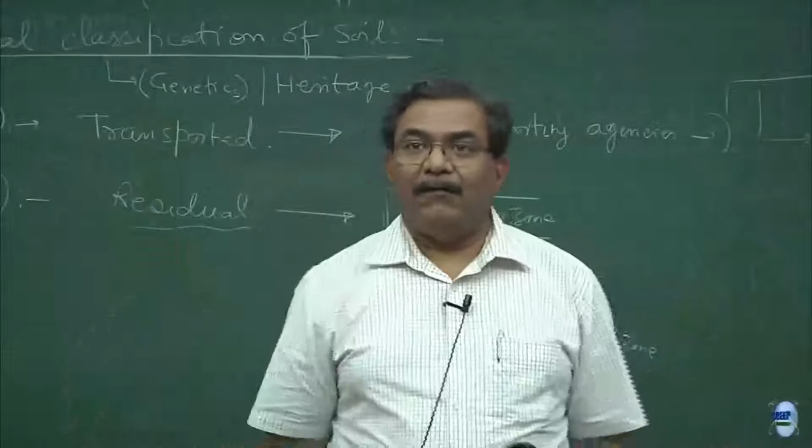So these are the places where most of the oil is deposited. Why? Big question. So whatever you are producing, what I was saying is that these deposits are very good in hydrocarbon. Even these deposits are very good in hydrocarbon. Why? And then I asked you a question: what is the similarity between coastal areas and the deserts geologically?

Okay, so try to understand this question and try to get the answer to this. Okay, next one. The common linkage is hydrocarbon, and the question is, if these deposits are not very stable, how am I going to create infrastructure on the top of it?

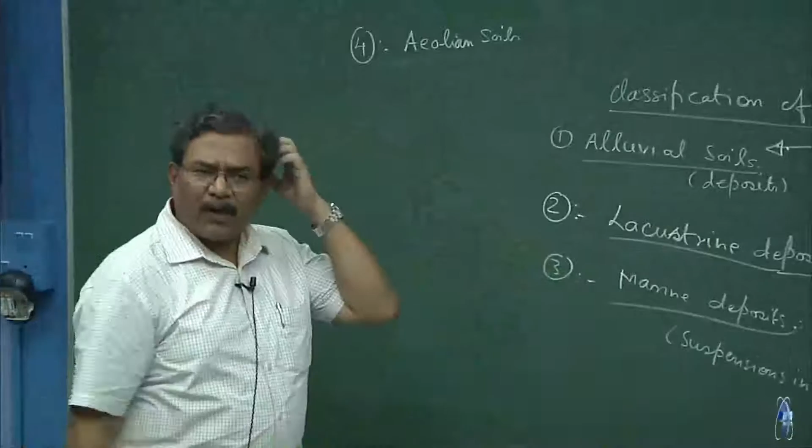So it so happens that you have created an oil tank which is normally 60 meters in diameter; 60-meter diameter is minimum, 45 meters is the height. This is the height of a typical crude oil storage tank. Fine. Now you measure it and realize how big this size would be. You can play cricket inside easily.

Now these systems are going to sit on these deposits, because just now I said that there are 9 fields of hydrocarbon. Very actively people are working on them to extract the hydrocarbons. Now how would you make them stable is a technology. It's not engineering, because people don't have much idea about how to do this type of work.

So most of my clients are from BPCL, IOCL, Indian Oil, Shell, Burmah, and all this. So I designed most of the foundations for the tanks for them. And right now in India there is a big movement. Everywhere, every city, the major issue is India should be self-reliant as far as energy is concerned, because our need for energy has gone up so much.

You must have been a kid when there was a big discussion in the parliament on whether India should go nuclear or not. Dr. Manmohan Singh was the prime minister at that time. Try to find out what geotechnical engineers have to do in this context. That will be another role, which you will realize geotechnical engineers have to play. Okay.

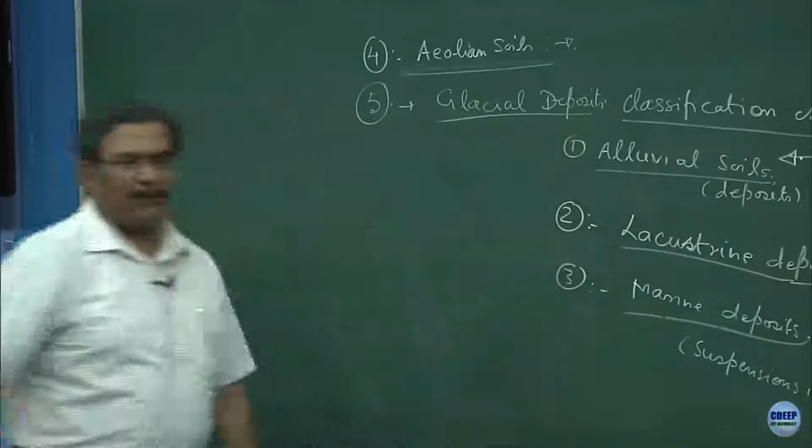Then comes the glacial deposits. I think I have given you enough idea about glacial deposits: anything which is formed due to ice. The sixth one is volcanic. You can say volcanic deposits. From a volcano, when it erupts, what's going to happen? Under very high pressure and temperature, the rocks get molten. This thing starts flowing. So this is your molten lava.

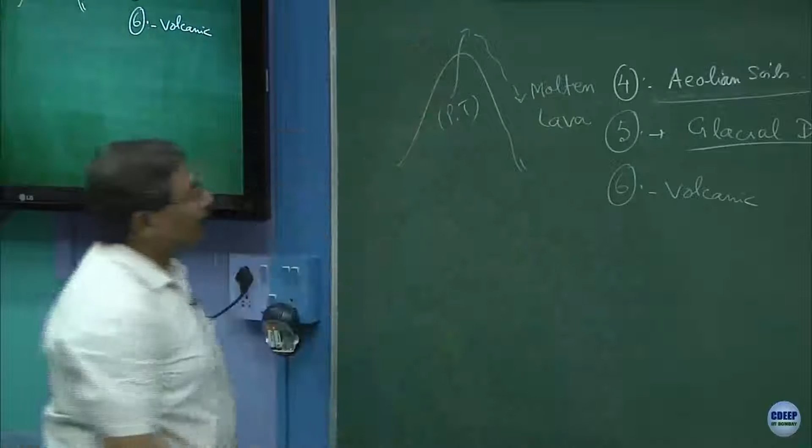And what happens? This molten lava comes and settles somewhere over here and forms the igneous rocks. And many times, because a lot of air or gases get trapped in it, there are vesicles. We call them vesicular igneous rocks. This is the process of formation.

If you get a chance to go to Japan or the countries which are quite heavily affected by volcanic activities, what comes to your mind would be a big challenge to a geotechnical engineer? In this context, you will be having a lot of settlements over here, is it not? A lot of buildings and so on. There are a lot of YouTube videos available. So I was talking about the management of the lava.

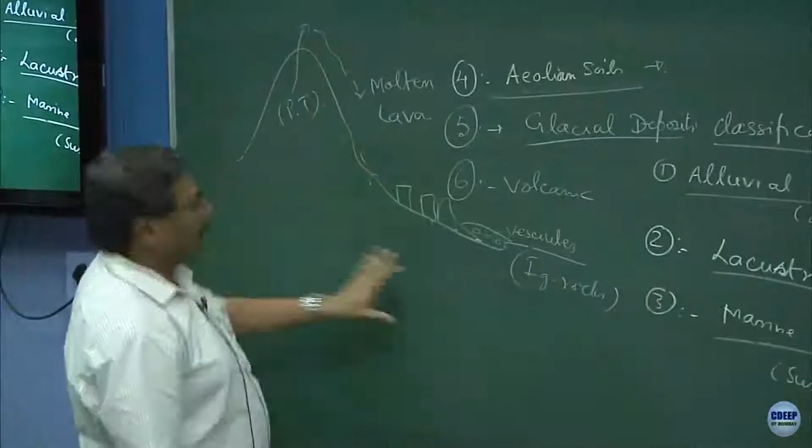Alright. So I hope you can realize a big task would be how to safeguard these settlements against the lava which is going to come out. Imagine what the temperature will be. So most of the guys are doing river training work. Check on the net what is meant by river training work. They may train the river entirely.

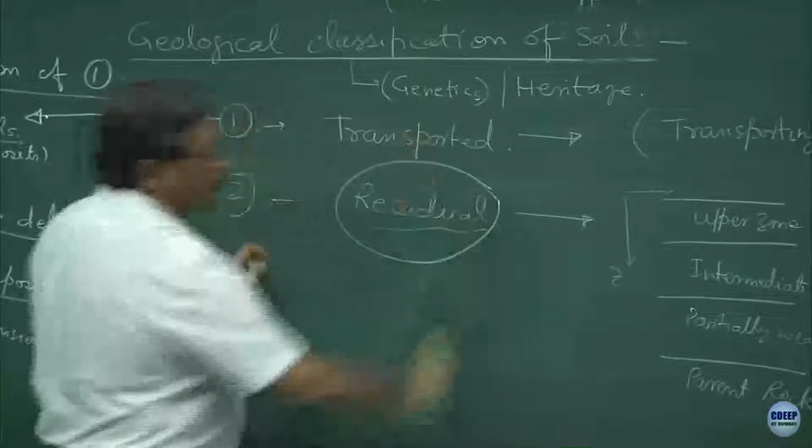So let's talk quickly about the residual soils. I have already discussed, most of these soils are upper zonal, intermediate zonal, partially weathered soils. They might be having a lot of organic matter in them. A good example of this is muskeg. I don't know where these deposits are in India. Check it.

Why is this important? Just to sum up what we have done today before we go. See, I have given you a complete philosophy of what this material is. Clear? In geotechnical engineering, we are talking about materials which are either soils or rocks, and I have given you the complete philosophy and overall picture of how they are formed, what their attributes are, what causes them to resettle somewhere, and how to utilize them.

In other words, I have talked about 3 states of the material: past, present and future. So, future is all about the engineering. The whole idea of this discussion is to give you enough background about the material so that tomorrow you can use it the way you want to use it.